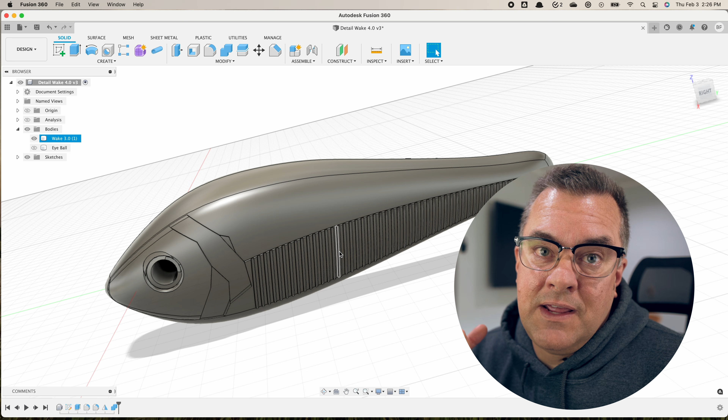So today I'm gonna show you how to design these in Fusion 360 and print them out on a 3D printer. Let's do this. We're gonna start with a lure body I've already made before. I didn't make this using the current techniques I use from my previous masterclass videos, but I really like this bait and wanted to get back to it and finish it. We're gonna put a lip on it and I'm gonna walk you through the whole process.

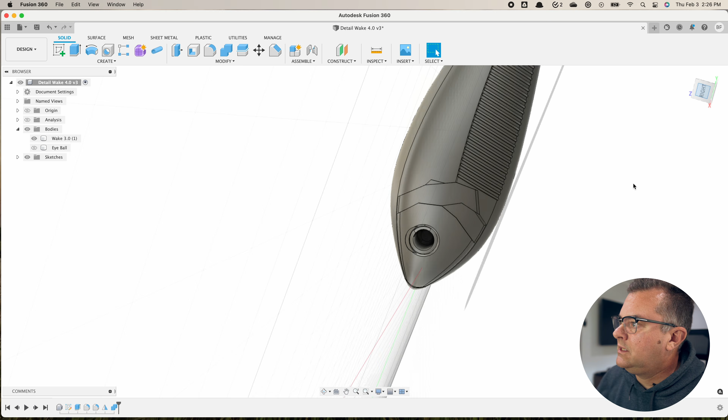We're gonna start off with some parameters because everything should have parameters. If you look at this lure, it's about 20 millimeters in width at the front here, where I'm gonna put my lip, roughly in this section. It's a wake bait lip, so it's gonna go pretty vertical, with a little bit of an angle on it. I already have a pilot hole here for my screw eye.

As I mentioned, I already designed this bait before I went down the path of making the lip. That was a mistake. You should make the lip, then do your pilot holes. That way you can put a pilot hole through the lip to help secure everything in place. You can't really get a screw eye through cured resin, it's just not strong enough. So what you want to do, if you can, is make your pilot holes after you've positioned your crankbait lip, but in this case, we're gonna fudge it.

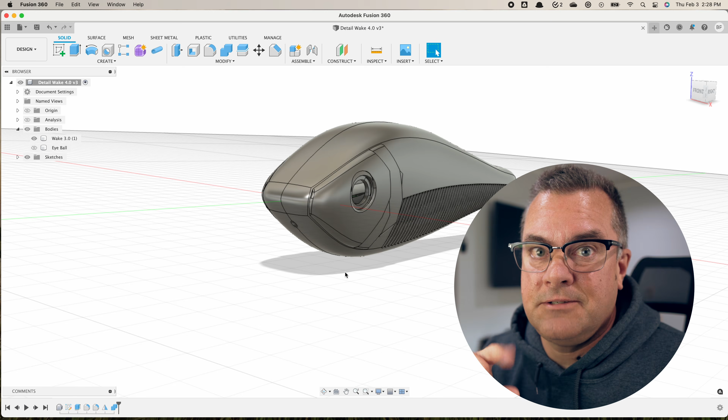So let's put in some parameters. We click modify and go to change parameters. We want to add lip top width, and that's gonna be 20 millimeters. Again, we can adjust these later, just getting some things in place.

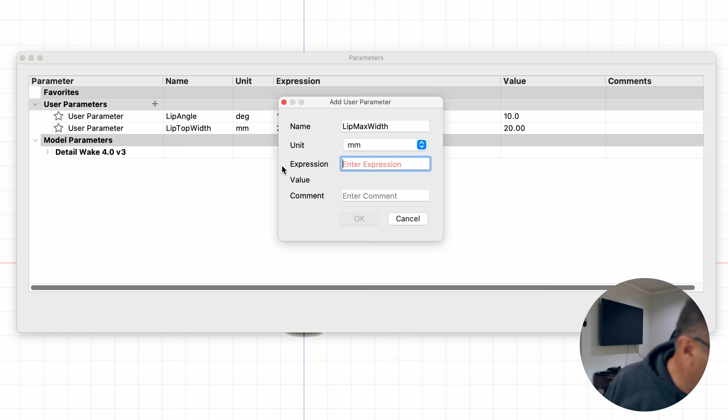Let's do lip max width. Frankly, I got no idea, so let me find a lure around here. Where's my wake bait lure? Dude, I basically sleep with that lure. I don't know where my Berkley Wake Bull is, but I got this Mann's. I think this is a 1-Minus or something like that.

So what I'm gonna do is just look at the ratio between the top entry point to the body and the widest point. If I measure the top here, I'm at 9.91, and at its widest point, it's 15.7. So that's kind of like a 50% increase, I'm gonna just call it, just for shits and giggles.

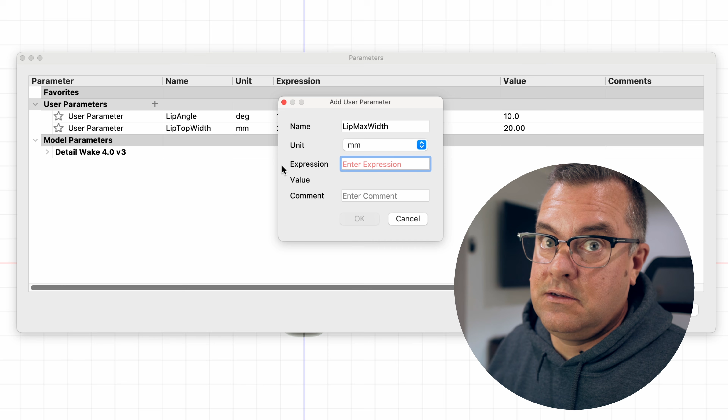So we can actually use some math to do that. For the lip max width, we're gonna take the lip top width and multiply that by 1.5, because that's roughly what we were before, 9 to 15-ish. Again, I can change it later, but that's probably a good starting point.

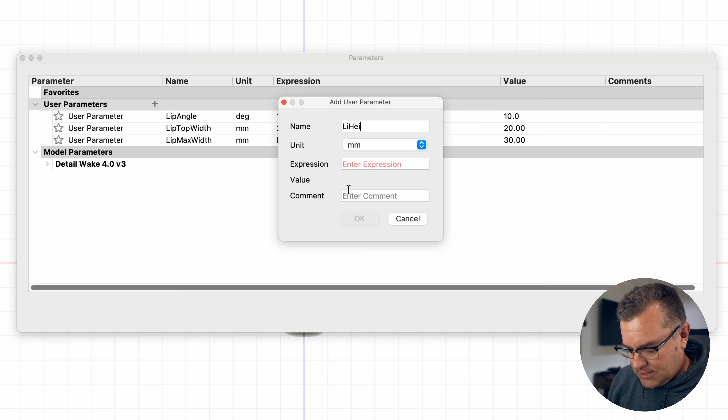Let's add our lip height. This one I'm kind of struggling with because I'm not exactly sure, since this one I got is a lot smaller than the lure I got. So that's 13.5, slightly smaller than the width. Let's do that then.

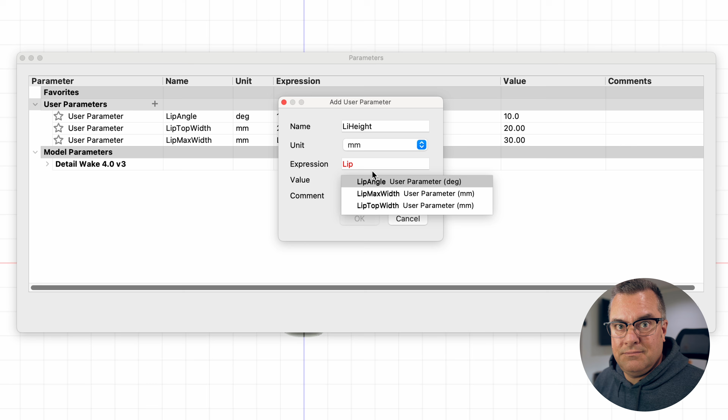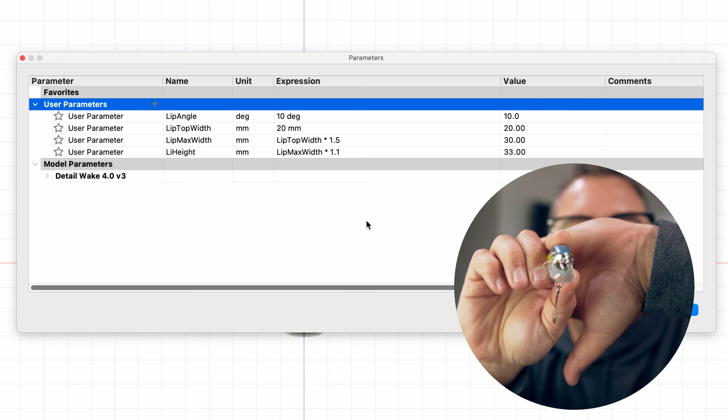Let's just do some more math. Math is fun. So if we do lip max width times 1.1, just for fun, it's 10% bigger than the max width, is how high my lip is gonna be. To be clear, we're talking about the lip height that's outside of the body. We're going to handle the inside of the body stuff totally differently. All right, I think that's about it. So we're gonna draw on this front plane here, and I actually don't need my body right now.

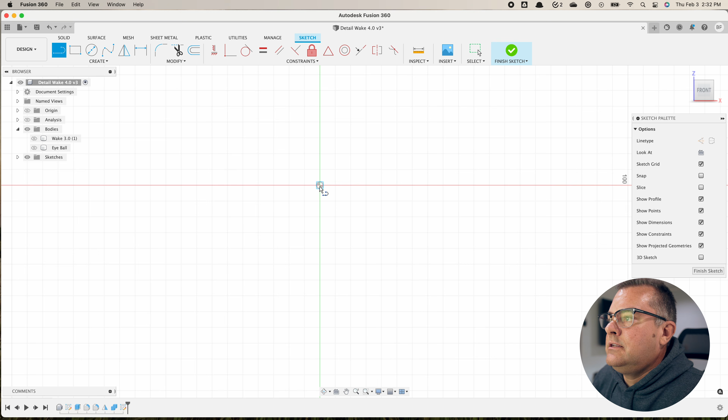That's only gonna get in the way. We'll need it later. So I'm just gonna make a sketch here and draw this line down the center. We're gonna design half and then mirror it over.

So this is going to be my lip height. I misspelled lip there—that's a tough thing to accomplish. My lip height, boom. And then we're gonna draw another line here, and that's my lip top width, and we want to divide that by 2, because again we're only doing half.

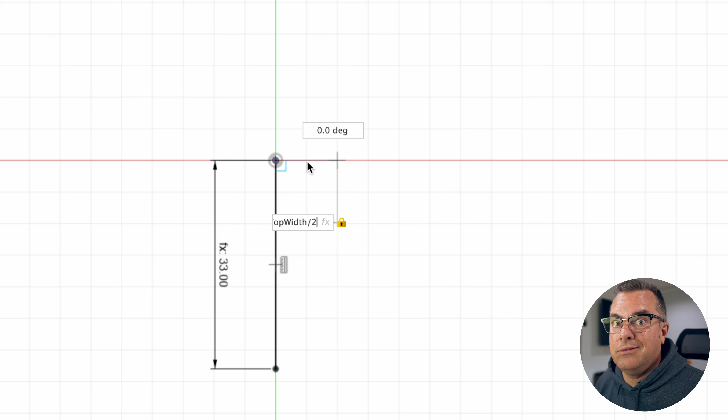I'm gonna draw another line, and I'll make this a construction line because it's not gonna be part of the actual diagram. This is my lip max width. Now one thing we can do here is use our lip height to calculate where that max width comes in vertically—at what point does it get to the max width.

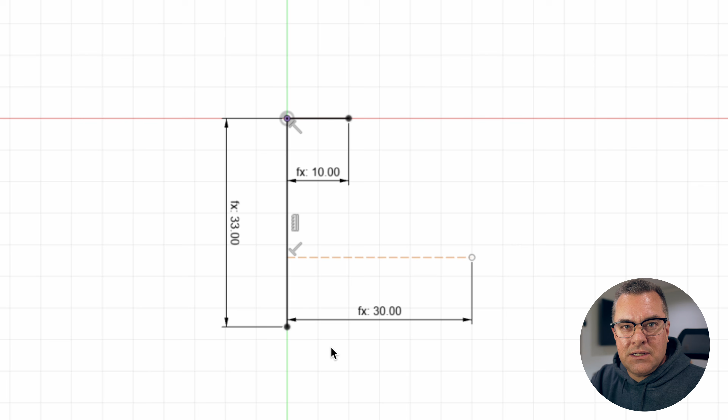To do that, we're gonna hit the D key for dimension. We're gonna click our center point, click here, come all the way out, and do lip height times, let's see, 0.85. So that's 85% of the way down the lip it gets to its widest point. And again, we can adjust these things later.

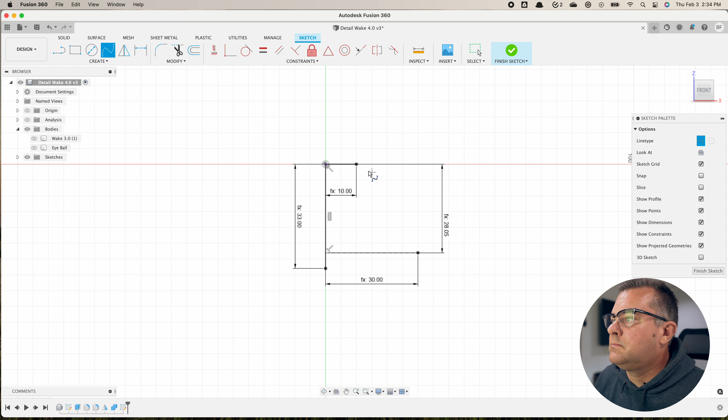Okay, that looks pretty good there. Now we just want to connect these segments with a spline. So I click point spline, click here—oops, I do not want to make this a construction line. Unclick the construction line and click here. Click the check mark, hit the escape key.

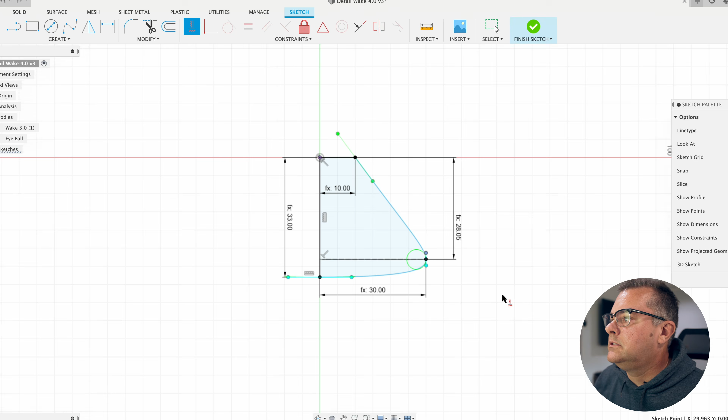I want this to be a horizontal vertical constraint because I want to make sure I come in flat across the bottom there. Then here, I probably want to go vertical on that guy too, so I'll put him in a horizontal vertical constraint. And then this guy—what do we want to do here? It's a weird fat looking lip, isn't it?

Oh, I see where I screwed up. Do you see where I screwed up? Leave it in the comments if you know. Okay, here's where I screwed up—see this dimension right here, lip max width? What didn't we do? We're only building half. Gotta divide by 2.

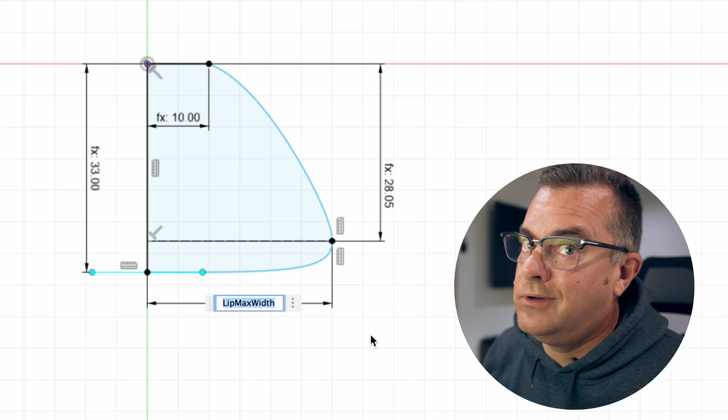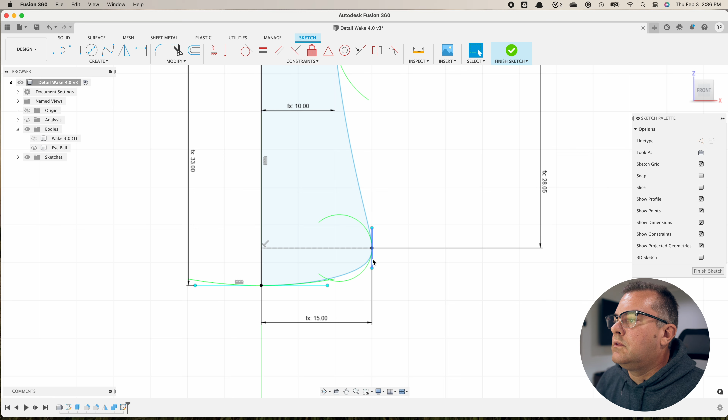There, that looks a little better. All right, so now bring this guy kind of down where he was before. Actually, I think we want to make him horizontal vertical too. Go straight off there, bro. And then we can just mess with—yeah, I think these constraints are, I constrained the wrong thing there. I constrained the 2 points instead of the line, and that's why it wasn't letting me adjust the distance there.

All right, that looks pretty good. So we're just gonna properly sketch these in, properly dimension these in, to get our fully dimensioned sketch. All right, it's all black, we are all good.

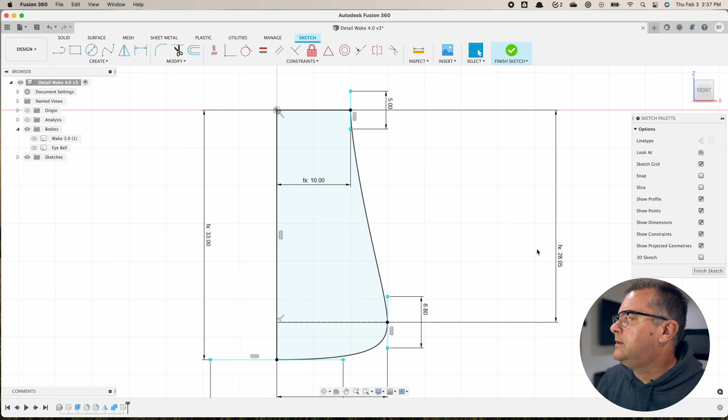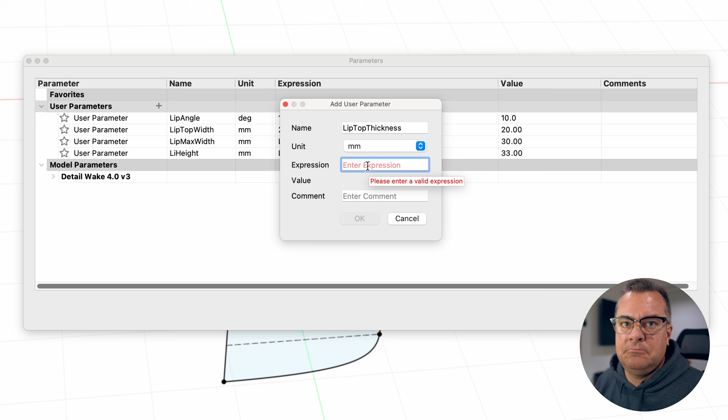Okay, I forgot to add a parameter. Let's go add it now. So the parameter I forgot to add was how thick we want the top of the lip to be. We're gonna call that lip top thickness, because we're super original. And let's make it, I don't know, 6. I have no reason for that whatsoever.

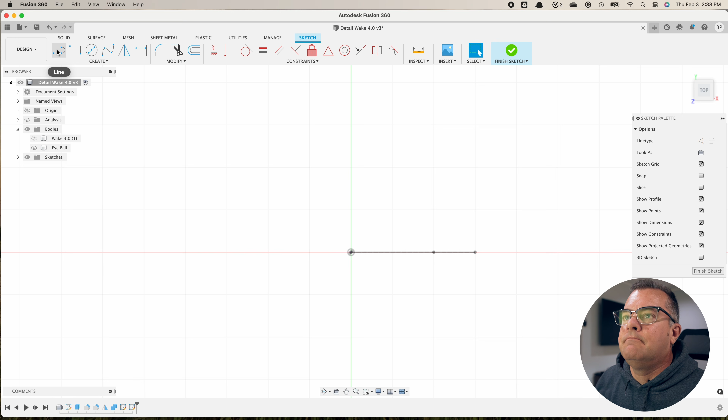Okay, so now we have basically the front profile of our lip, and all we need to do now is draw the very top of the lip where it's going to enter into our lure body. So we just make a sketch on the top here. We're going to draw another line—this is lip top width divided by 2. Let's not make that mistake again. This is my lip top thickness.

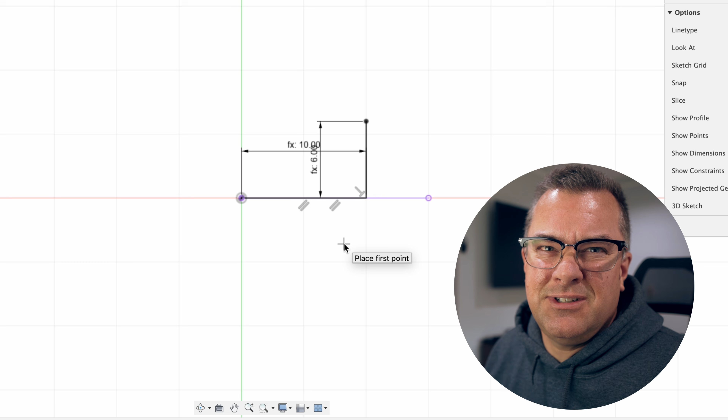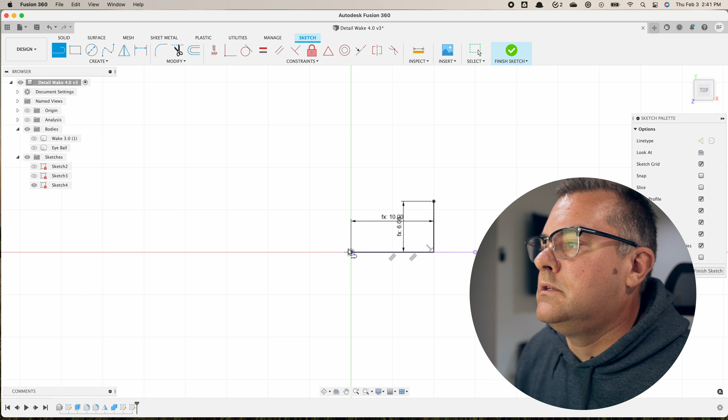So I'll come back to the middle here and I'll make this my lip top width. Lip top thickness, duh. If I come over here, I'll just do lip top thickness, and I'm gonna multiply it by 0.80, so reduce it by 20% roughly. Make this line 80% as long as the other.

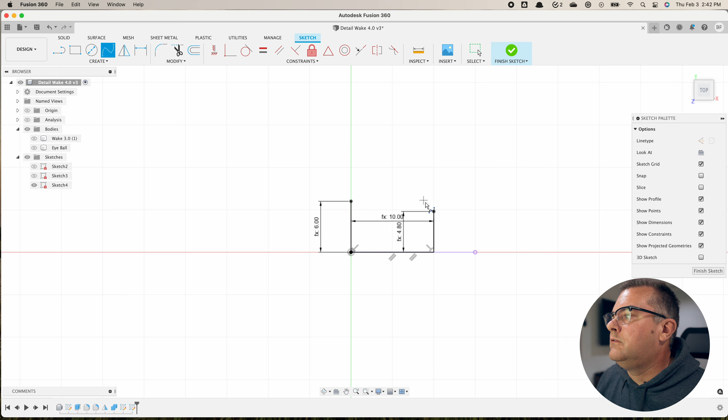Then we will just take our old friend, the fit point spline, connect these two, and kind of mess with them until they're at a place we want. We'll make that horizontal vertical. We'll actually drag it out pretty far. Take this one, bring that back in slightly. Again, man, you do you here. That's gonna be good for me.

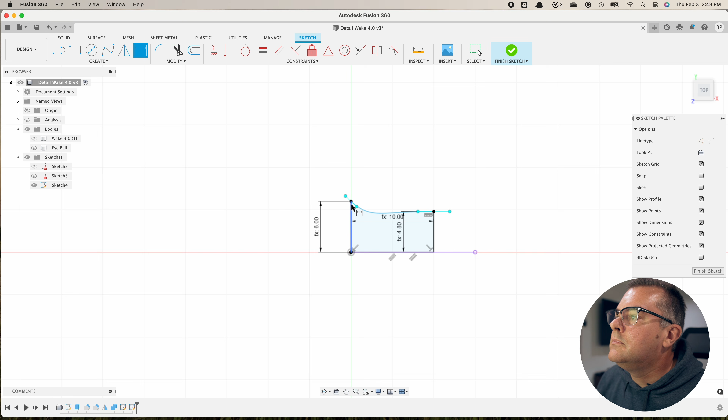So I'm gonna hit the D key here, we're gonna zoom in to make this a lot easier. Make sure we're selecting this handle, click this line, that'll give me an angle. Let's just make that 47. We're going to dimension this, make that 1.8. And dimension this, we'll make that 3.8. All right, now we're fully dimensioned, all black.

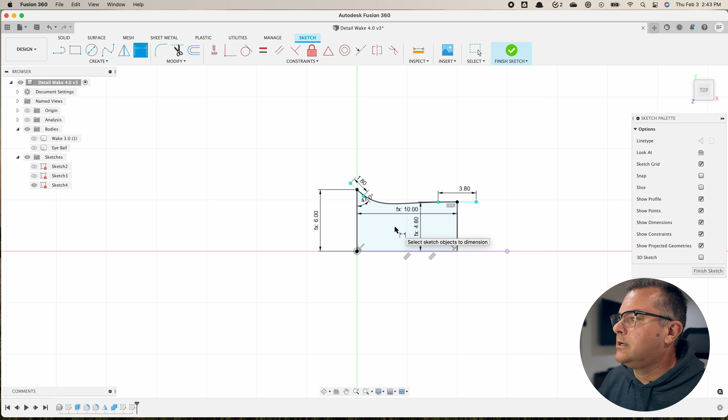Finish sketch. All right, so now what we do, let's bring back our other sketch. And you can see I now have this profile going on, maybe, if I don't drive Fusion while I'm drunk. Okay, now we have this profile going on.

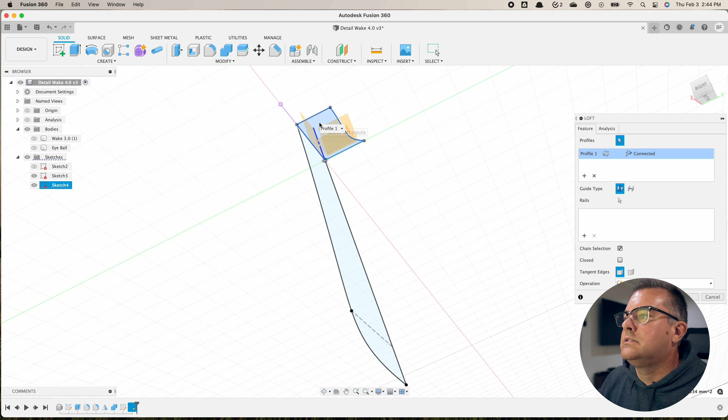So what we can do is now we just want to loft these guys. So I'm going to create a loft. I'm going to scroll around here to kind of the back. I'm going to select this and this. And you can see, boom, you instantly get a pretty awesome looking lure shape. And we can leave a new body. We don't really need any rails.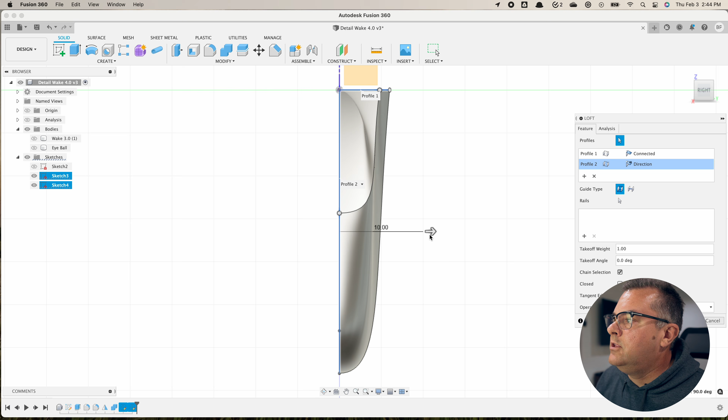Let me show you one thing you can do though, is this second profile. Instead of connected, we can do direction, and you can add a lot more body down the whole length of the lure lip. And you can adjust that just by moving this here. So I can puff it way out, I can bring it in, and that really impacts this side view here. You can see how it's making it thicker or thinner depending on how far I pull that.

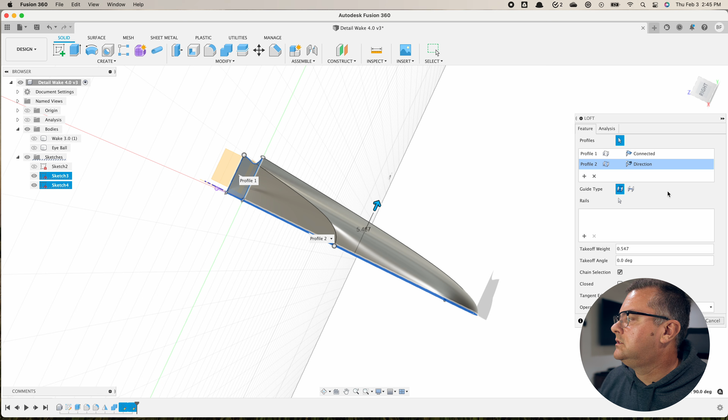And I'm just gonna, I don't know what to make that, dude, so we'll just eyeball it. We'll keep it kind of thick, chunky. Like, okay, there we go. We got a little bit of a weirdness going on right here, but that's all right. World needs a little weirdness right now.

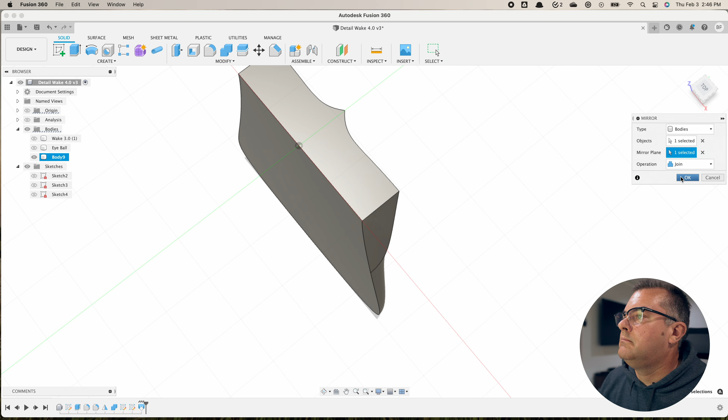Okay, so then we're just going to mirror this. Mirror, we want bodies, we're gonna select this, our mirror plane. Obviously gonna be this, and we can join them together because we want one piece. Boom, and there we go. Got a nice edge, all that goodness.

Perfecto, let's bring back our wake bait now. All right, so we're just gonna rename this body nine to lip, not likip, lip, to make things simple to keep an eye on. So it just kind of got lucky that our lip ended up in pretty much the right spot. It's not the right angle, but it's in pretty much the right location. But I'll show you how to move it around just in case it doesn't go into the right spot on the body, which it most likely won't.

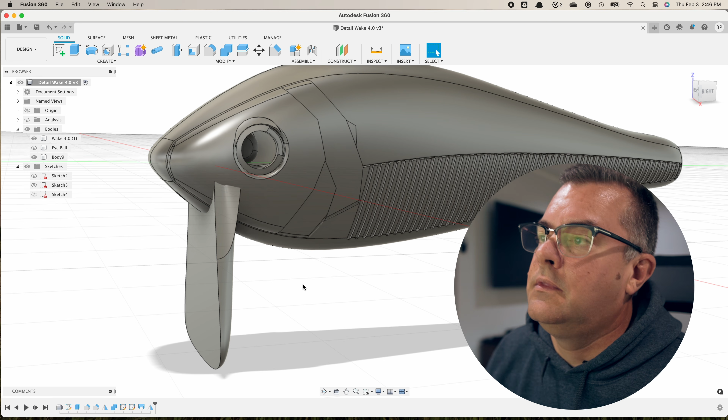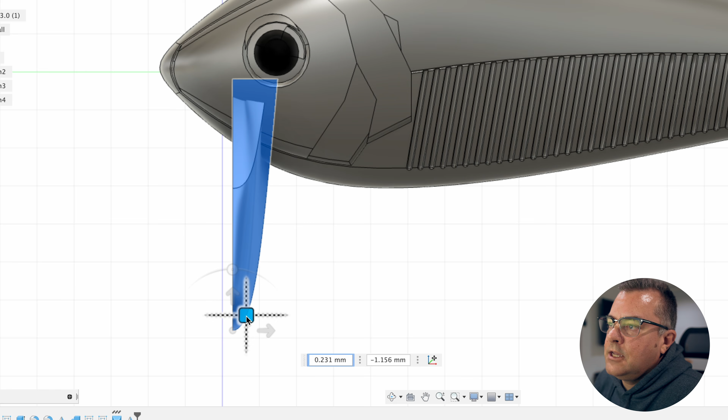All right, so now we just want to move this into the space. We click move, we want bodies, we select lip. And if I needed to move it back and forth, you want to make sure you're on the side view here, and you want to make sure you're only selecting the arrows or this guy, right? So if I know I only want to move it back and not vertically, I just select this and move it back. If I only want to move it up and down and not side to side, I click that. If I want to move it wherever I want, I can click that, okay? And I already have a section analysis, so I'm gonna turn that on here and we can kind of see inside. If you don't have one already, you can make one.

The other thing you can do is turn on the opacity of your lure body, turn it down so you can see through it. So let's do that real quick. Right click on the wake body, opacity control, make it 50%. Now we can see through it, kind of see what's going on. And then we'll go back to our move command, select our lip.

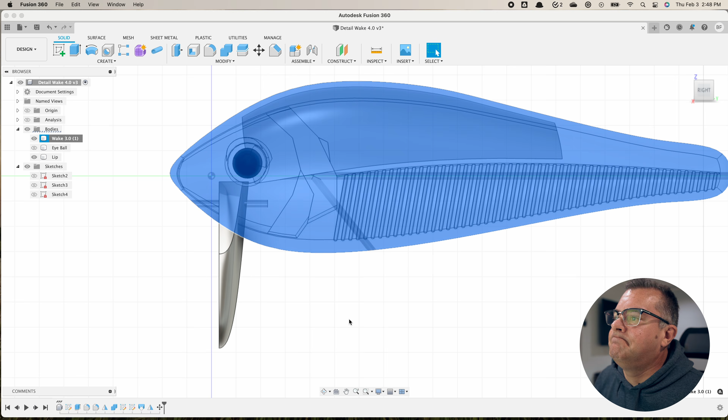You really want to see inside just to make sure you're not running into any features. Like I probably want to make sure I stay out of that cavity there, and I probably want to make sure I'm not impacting these eyes. But one thing we talked about is we were modeling the lip as if it's outside of the body. And we're clearly inside the body now.

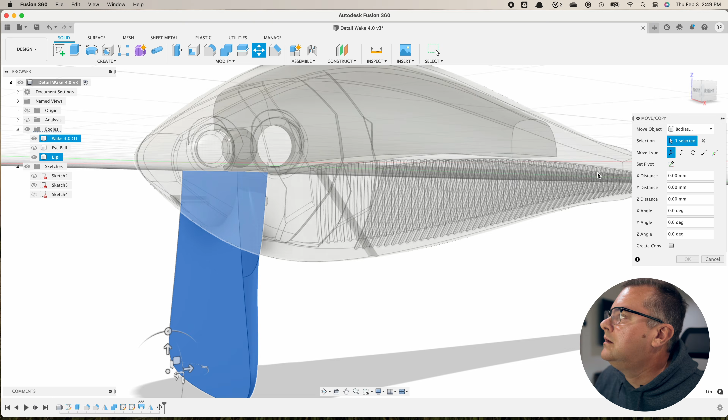So we want to actually move this down until we are outside of the body. That's how we make sure that the lengths we chose at the beginning, that we measured off of that manual, that we get the full length of our lip. If you look at any lip diagrams that have the measurements on them, they have a measurement, and that's generally speaking outside of the lure body, not the total length of the entire part.

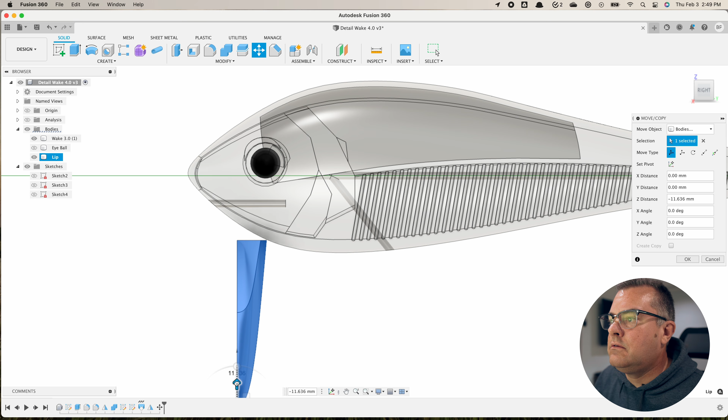So I'm gonna move this down all the way I want it to go. And then here is where I change my degree, right? So on a wake bait, it's a pretty stiff angle. You can just grab this and kind of fiddle it around wherever you want to go, make it an angle. I think I actually have a parameter. Yeah, lip angle, look at that.

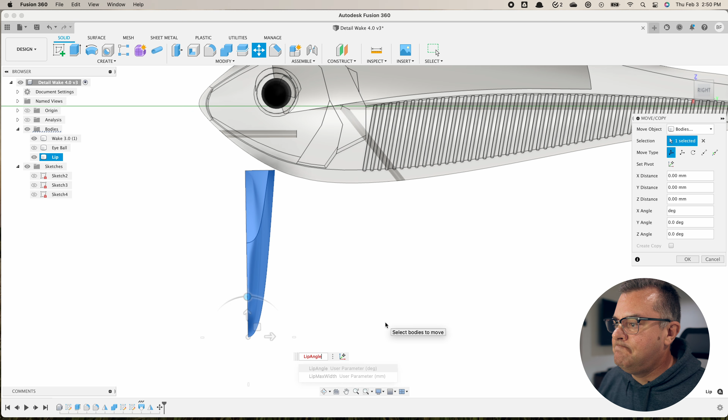But it's wrong. Can I do a negative lip angle? I have a problem with doing degrees in parameters because I kind of never know what's going on. But negative lip angle gets it done, which I'm pretty sure was 10, just like I had it before.

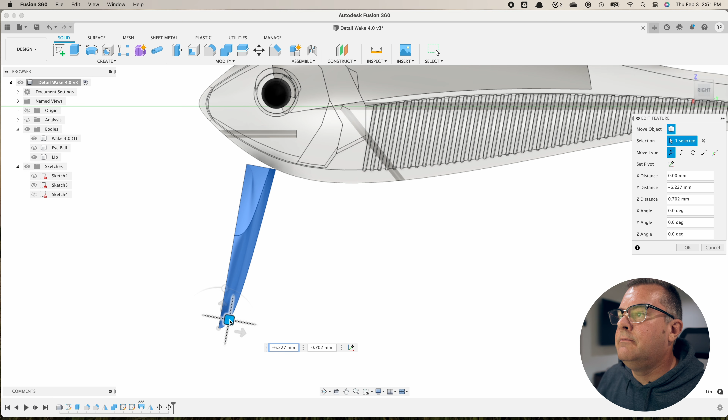Okay, so we got our angle on there, and now is probably the easiest time to move it into place where you want it on the body. I just try to make sure that when I position it, I have one piece of the lip body kind of close to the lure body, but not necessarily all the way in there. It's not rocket science. Just get it close, but don't shove it all the way up in there. We're primarily concerned right here about the angle and where it is in relation to the lure body.

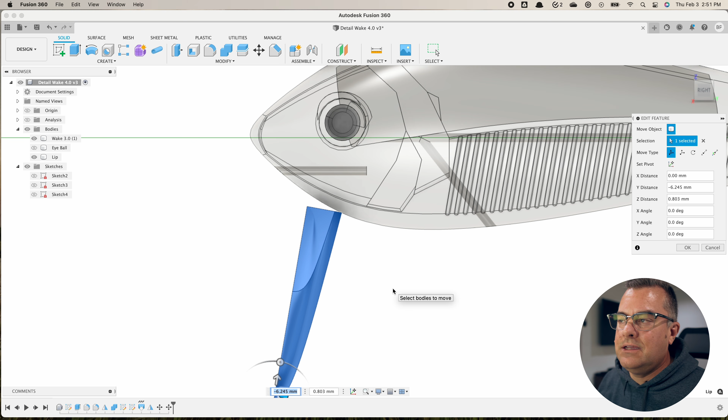Okay, that looks good. Click OK. Now what we want to do is build the part that's going to actually stick into the lure. For that, we're going to select this face here, click the extrude command, and probably easiest to look at the right view here, drag it up and into the body. Now you can see we're on join now. That's why this thing went solid again, because it's really picking up the settings from the lip, and the lip was not clear.

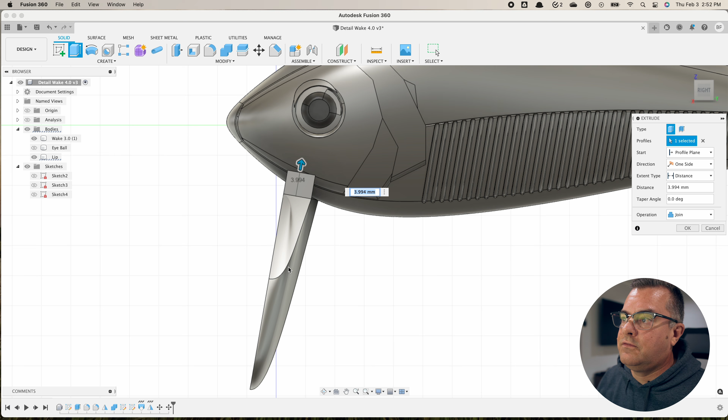But what we actually want to do is do a new body, and that'll turn the lure body clear again, so we're not joining it. We're gonna go ahead and pull it up all the way through this pilot hole. Again, like I said before, you probably want to do the pilot hole after you do this step, but we like to make things difficult here. Just make sure you're not into any other parts.

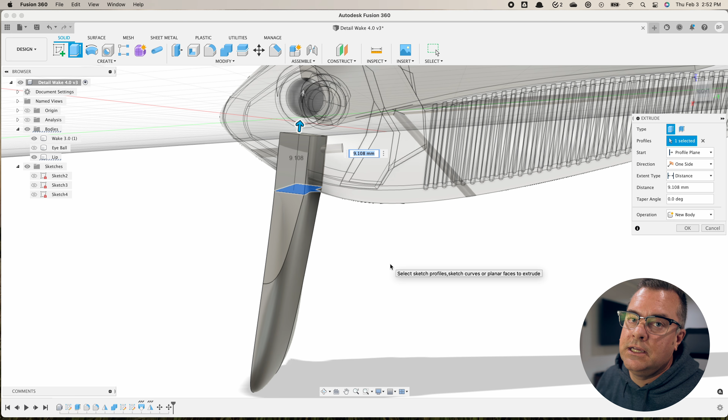We're gonna actually cut out this section in a minute, so we want to make sure we're not cutting into anything on the lure body, which we printed separately, that would cause us problems during the print. So that looks pretty good. I don't know, there's probably some sort of magic number, you want to make sure you get it in there a certain amount. I got no idea. These generally work for me when I eyeball it.

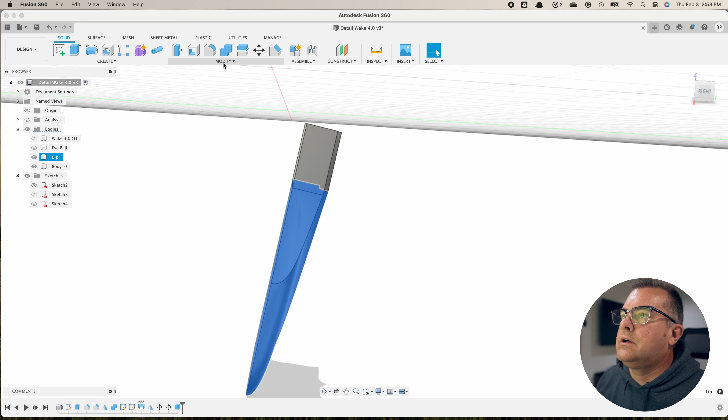Click OK. So now you can see we have this extra body hanging out over here. I'm gonna turn off my wake, and I want to join these two together. So click on lip, click combine, click on body 10, oops, sorry.

Click on tool bodies, click on body 10, and we can join. Boom, that just makes us back to one lip. Now we can turn back on our wake body, and now we want to do this combine command again. Our target body is the wake body, tool body is the lip.

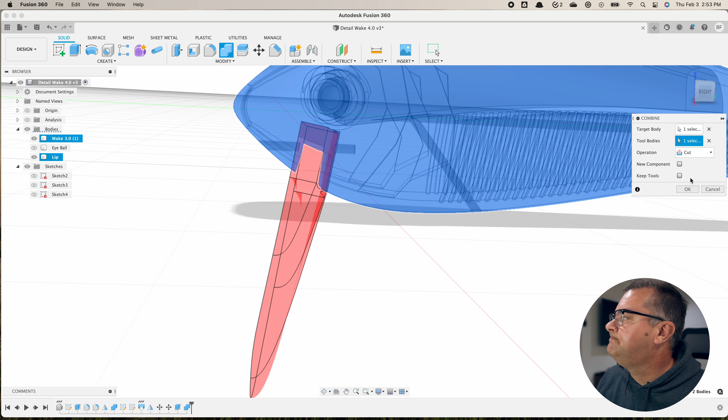We want to cut, and most importantly, we want to keep tools, because we're going to need to print this lip out later. We want it to hang around. Click on OK, so now you can see if we hide our lip, we have the cutout in there, and let's turn the opacity back on to 100%.

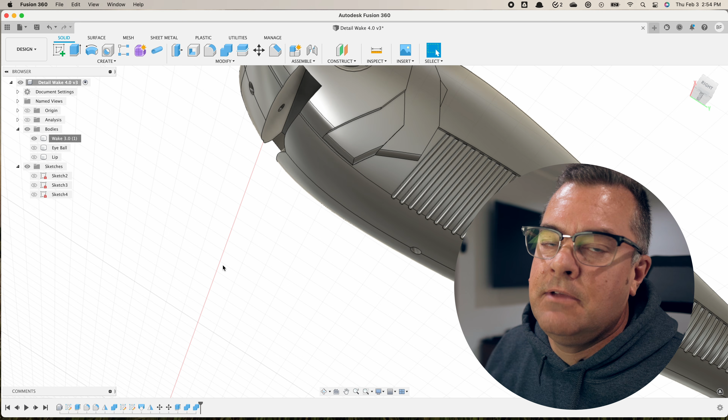Boom, so now we have this all nice cut out. You can imagine when you print this thing and print the lip, it's gonna slide right in there. Actually, probably not if you're printing it from two different resins. In my case, I'm printing the lip in Tech Blue, which is a very hard, clear resin, and the body most likely in Tech Fast, which is a cool green resin.

So I know that the Tech Fast that the body is printed in is gonna shrink more than the Tech Blue that the lip's gonna be printed in. So I need to compensate for that.

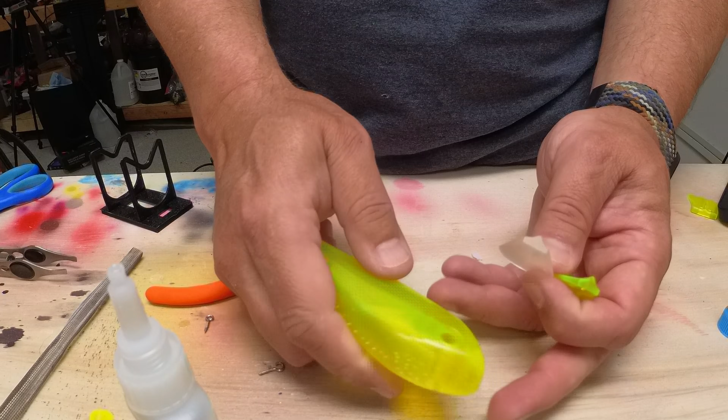So I want to show you these two lips and this lure to highlight an issue that you might run into. This lure is printed in Tech Fast Green, their ABS-like resin. Again, I haven't really tested to see which resin is best for lures. This is some stuff I had, and I just think it looks cool because it's green.

Then I printed this lip in the same resin, obviously, and then this lip is printed in Tech Clear Blue V2, which is supposedly one of, if not the strongest resins out on the market today, at least on the consumer level. The point here is that these resins have different shrink factors or ratios.

So if you're going to mix resins, change resins between your lure body and your lip, you want to make sure you know if it's going to shrink or not, and compensate in the lure body or the lip body accordingly, right?

This one will slide in pretty easily. This one is a little bit too big, and you can see there it's not quite fitting in, and I need to sand this off here. Now, it does have a little bit of elephant's foot as well, but this shrinks from my testing about a little bit less than 2%. This resin shrinks at about, I think, a little bit less than 4%.

So even though I fitted them in perfectly in the model, when I cut them out, I needed to either offset the face here a little bit, make more room here, or again, change the dimensions here. I find it easier to change the dimensions in the lure.

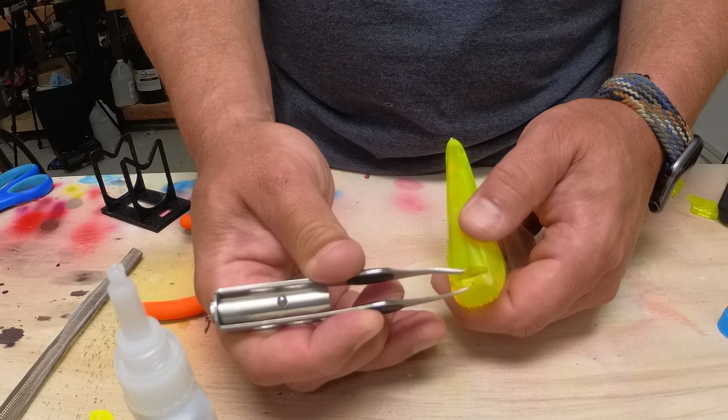What I do is come into this face right here, click there, and use the offset face command, and just move it back about 0.3, 0.2. You'll need to experiment, but having it a little loose is okay because we'll fill it in with some resin or super glue later, no problem.

Easiest way I found to do that is to come in here, click this flat face, modify offset face, and just pull it back just slightly. Probably negative 0.1 is good, and that's gonna give us just a little bit of room there.

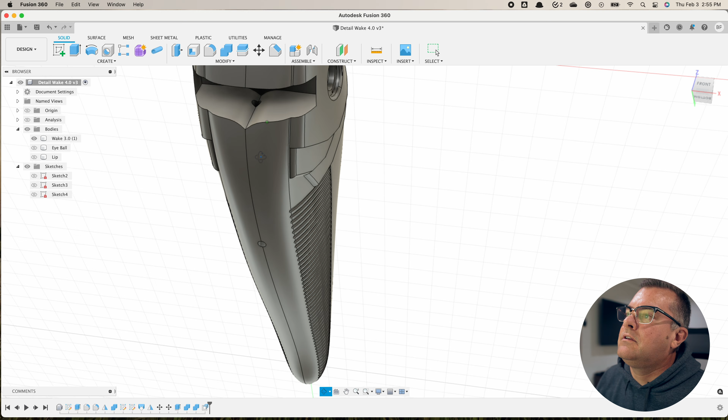Now, when you have something shaped like this, that can cause you a problem as well. So maybe I want to undo that one and offset this face, because what you have here is this little bitty section in the middle, and you need to open it up to make room for that.

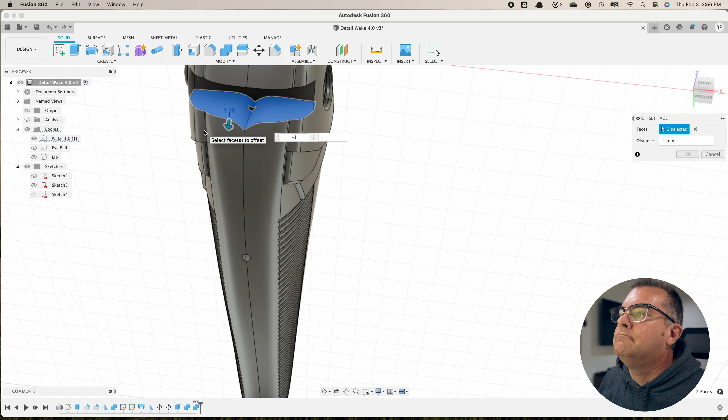The flat piece on top will get compensated for anyways. So let's offset face, negative 1. That was all a screw up — negative 0.1 is what we're doing. All right, that looks a little funky, but oh well, we shall survive. Okay, that looks pretty good.

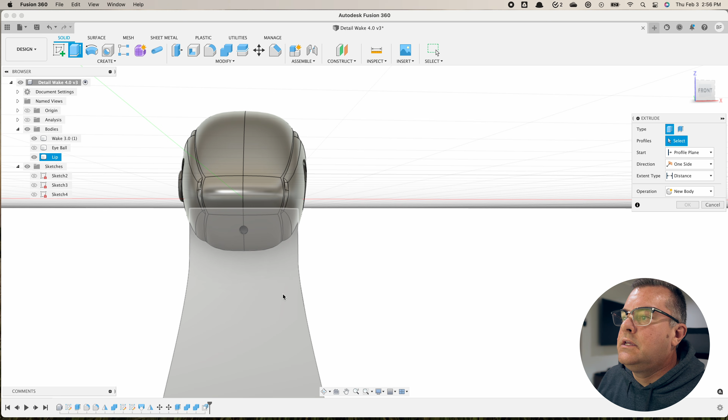Let's get back, let's add our lip back in here, and let's make our changes to our lip. Now, remember we talked about this kind of screw up I made before. Easiest way to solve that: turn off the lip, and in here, there's this circle right there.

So it's basically the back of that hole is what I'm selecting. I'm gonna turn back on the lip, and make sure this thing comes all the way through, and make sure we're on a cut, and objects to cut. Make sure our lip is selected, right?

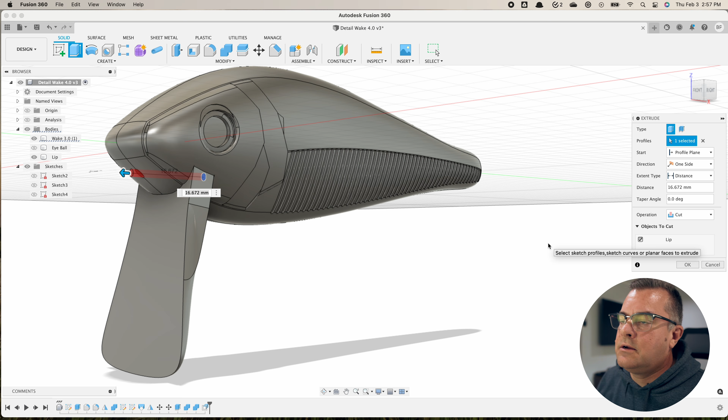Shouldn't cut the body because it already has that hole there. If it does, you might be doing something wrong, but we want to make sure we add that hole to the lip. Click on OK. So now if I have my whole body, boom, we have a nice pilot hole through there.

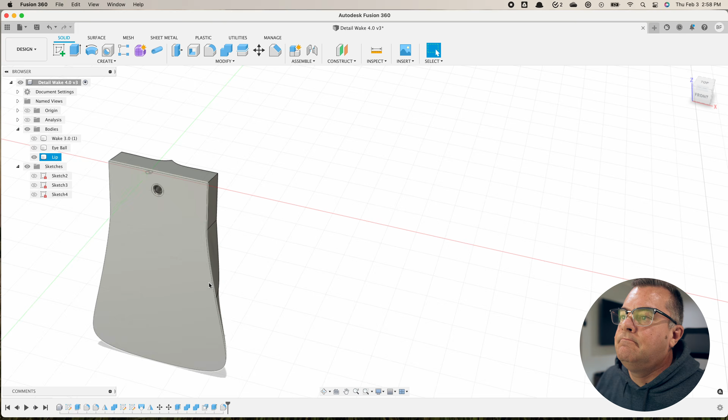Now we just want to clean up the lip a little bit to make things easier. So for this hole, let's add a fillet. Maybe not that big, how about a 0.5? Little fillet. I don't think I can fillet this, but let's try. Yeah, okay, 0.2 there.

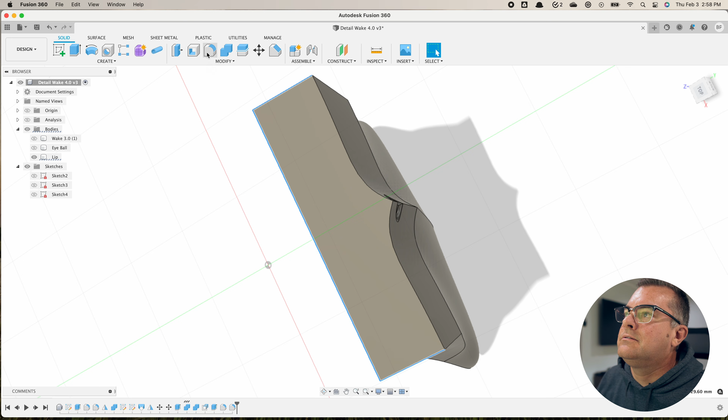I'm going to basically print this surface flat to the build plate to make things super easy. So we want to add either a fillet or a chamfer. I think I can chamfer these side edges pretty easily. Let's select those, add a chamfer, maybe a 1 on there. Yeah, that looks pretty good.

And then I probably, let's see, can I chamfer this? Let's try. I don't think that's going to work. Oh, look at that, it does work. Excellent. Okay, so I could have selected the whole thing, but I wasn't sure if that chamfer was going to work with that peak in there.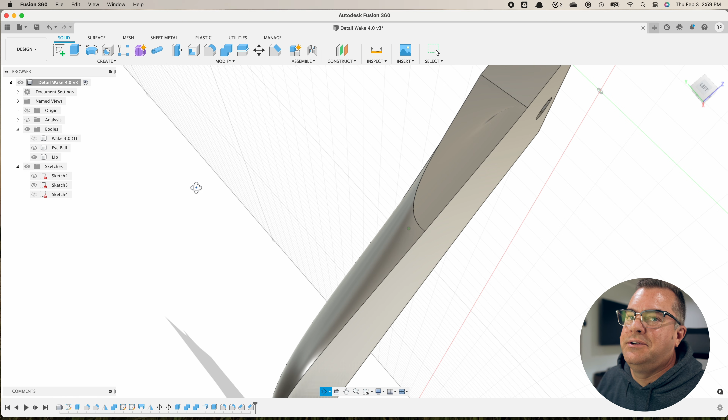Okay, click on fine, and now our lip is ready to print and be part of the lure. Now again, if you wanted to, you could combine these bodies together and print it all in one piece.

I will say it gets a little tricky to print that way with all the support structures and stuff like that. So even if you're using the same resin, I would strongly recommend printing this separately and then gluing it into place later. It's fairly easy to get lined up because we got a nice slot in here and we have our screw eye coming into play that is going to kind of force it into the right spot, if you will.

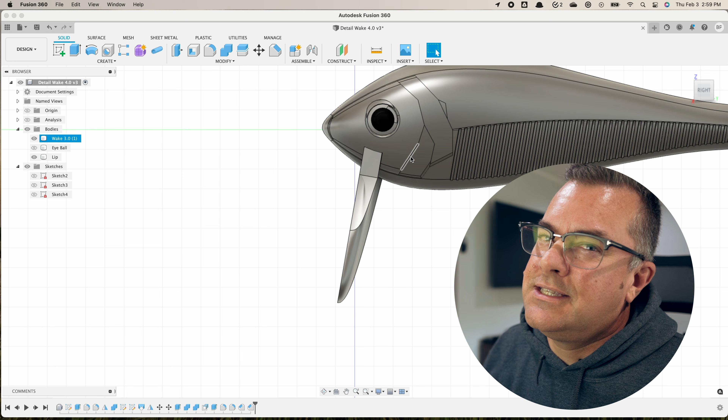And so that's the easiest way to go about it. If you combine the two and try to print them with all the supports, not so easy.

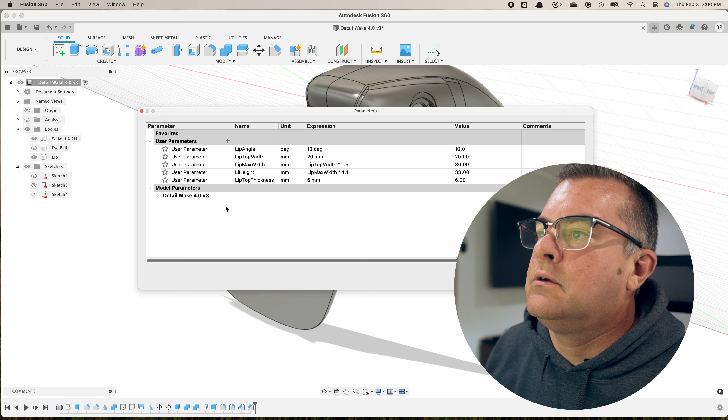All right, so now that I'm all done here, I noticed that this lip looks absurdly long. And since we use parameters and all of our sketches and everything were fully defined, that's really easy to fix right now. So we just go to change parameters and we look at our lip height.

I'm gonna fix that now because it's super annoying. And instead of it being our max width by 10%, actually I think I want to make that a lot smaller. So let's do this, maybe times 0.7, so 70% smaller. If I click, my computer will think a little bit, and then bingo, it'll update that to 21. And you can see the corresponding change out here, okay?

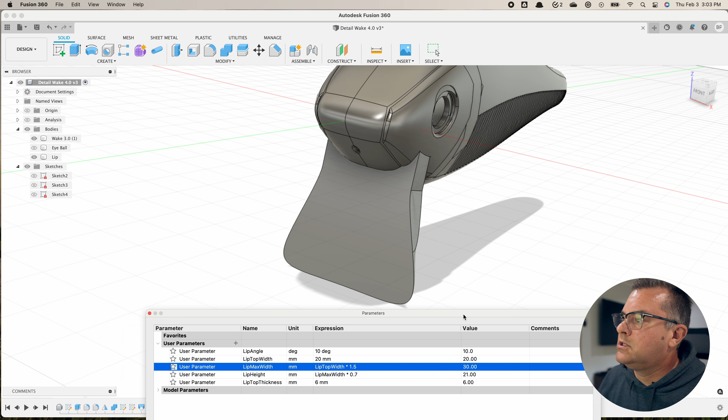And you can play with that if you know what that dimension should be. You don't have to do the calculations that I did. I just kind of thought we would use that as a ratio. If I know I want it to be 25, I can just come in here and say it's 25 and be done with it. And all the calculations will update.

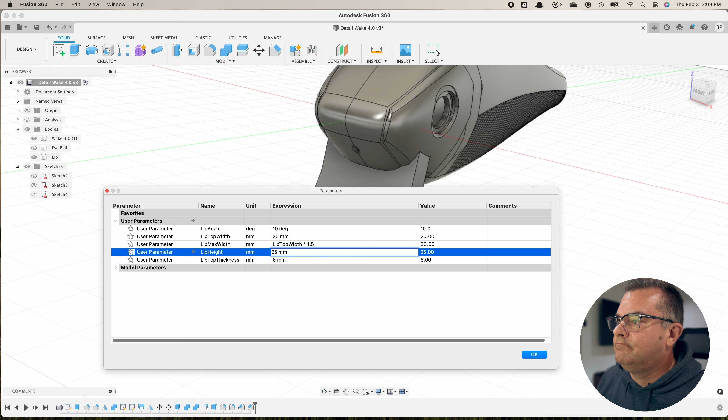Actually, I think I'm gonna make it 20. And that looks pretty darn good.

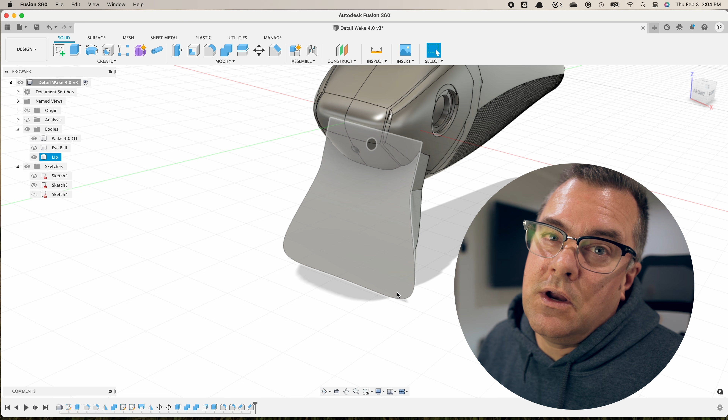Now, I usually don't go and try to soften these front edges because actually the more sharp that front edge is, generally the more action you're gonna get because it's pushing the water completely sideways around your lip. If you wanted to, you could come in and soften it up and kind of go crazy there, but I kind of like that. So again, please keep in mind, you can make this whatever angle you want, but set the angle of the lip before you do the extrude into the body. That way you kind of have the right angle and everything set.

Let's go print this bad boy and see what it looks like.

All right, guys, we got the lips off the printer. We cured them and cleaned them, all that good stuff, and now we're ready to put them into our lures. I'm gonna show you a couple of different lips here, give you a couple of ideas on how to approach printing and really prototyping them more than anything.

So I got two really different lips here. I'm working them on this wake bait here. The thing I want to point out is they both basically start from the same profile at the top. So you can actually print multiple versions, and as long as this top profile is the same where it goes into the lure, I can put this lip in here, and this lip is pretty ridiculous actually.

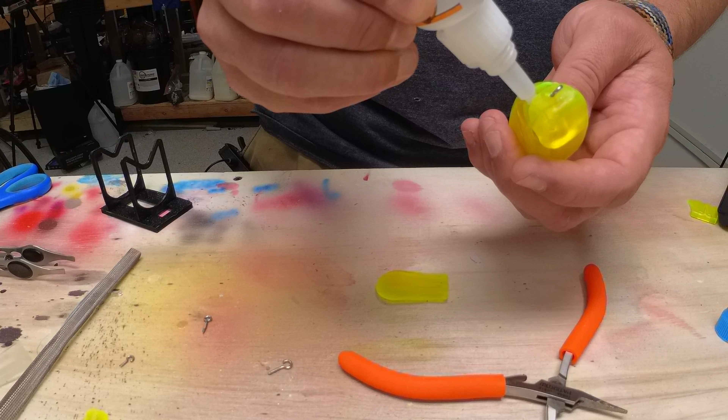If you don't have one of your screw eyes going through the lip like I do, it's pretty easy. You just come in here with some super glue. I should really have my gloves on because I like to glue my hands onto things. Come in here and just apply a little here, a little there. I try not to get too much in there because then it will squish out the sides.

You're probably better at super gluing than I am. I'm gonna put a little bit on there because I'll need that. But if you don't have this screw eye going through the lip like I do, just a little super glue, sliding it in there, getting it seated, and you're good to go.

Now if you do have a screw eye, I put a little super glue on this screw eye, and you're gonna wanna screw it in. Now, one thing I didn't show you is I do dry fit this stuff before I go to glue it, because if for some reason you didn't get this screw eye lined up correctly, you really can't force a screw eye through this resin. This isn't even tough resin, this is like regular Tech Fast Green, but you still can't force one of these through. They're not meant to be driven through anything really hard, so you're just gonna shear that off there.

Oops. That was my air compressor, that wasn't my belly, I promise.

All right, and you're in there, and it's already pretty secure because it's got this pin through it, but you let that dry up, and you're totally good to go. So I got a rag with a little isopropyl alcohol in it. I use this to clean up any rogue super glue before it dries, just so it doesn't get in your way later. And there it is, ridiculous wake bait lip.

See how it performs. All right, guys, I hope you found that super helpful. You don't have to use resin crankbait lips for resin lures. You can obviously print them out and put them in any lure body you want, whether you're carving them with wood or other resins or whatever you're doing, bro. Don't be shy, because the cool thing about it is you can print an absolute ton of them for relatively low cost and relatively quickly.